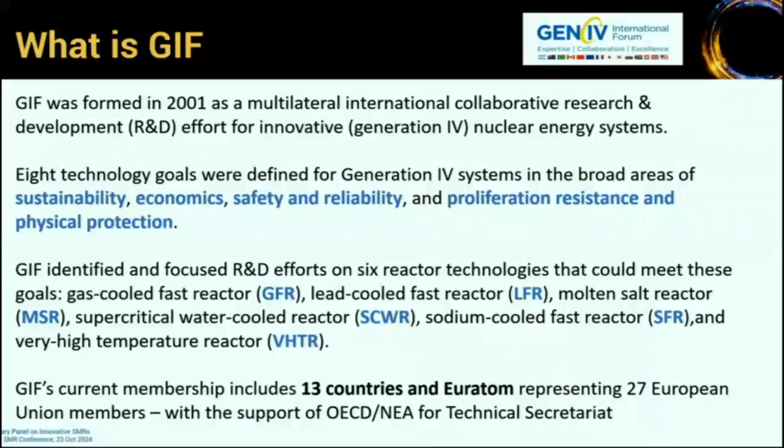In terms of major goals, we have sustainability, meaning long-term fuel supply, minimization of waste and long-term stewardship burden. We focus also on excellence in safety and reliability, with very low likelihood and degree of core damage, and eliminating the need for off-site emergency response. We also work on economics, with a life cycle cost advantage over other energy sources and financial risk comparable to other energy projects. And finally, proliferation resistance and physical protection, in terms of unattractive material diversion pathways and enhanced physical protection against terrorism.

The key mission for the past 3 years was accelerating the readiness of Gen IV systems to meet the 2050 net zero goals. We strengthen Gen IV system features for combating climate change with flexible operation and non-electric applications, an important point we developed. We support transition from R&D to demonstration and deployment in terms of TRL, but also regulatory readiness and improved economics. We strengthen GIF relevance to industry with close connection with industrial partners, and we have a senior industry advisory panel. And we support the Gen IV talent pipeline. It's very important for us to increase the attractiveness of our field to young talents, and we support development, demonstration, and deployment in this field.

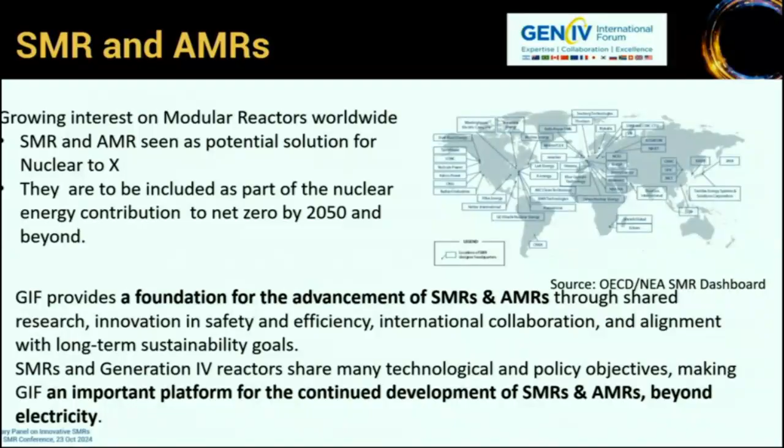Then more recently, Google with a great deal with Kairos Power, and the first reactor from Kairos Power is the first in 50 years that is a non-LWR reactor that obtained clearance for construction in the US. 50 years. So it's a very important milestone. And more recently, Amazon invested more than 500 million dollars in X-Energy to develop modular reactors. So we are facing a very important momentum. So collaboration is key for successful development in this area.

And of course, we have a great cooperation with IAEA, and the IAEA participation in GIF methodology and working groups is very important for us. GIF IAEA interface meetings coordinate collaborative efforts. We have a joint workshop on safety and advanced reactors, and we participate in NHSI, the Nuclear Harmonization and Standardization Initiative. It's very important for us. GIF is very involved in that field, and for us, NHSI and Harmonize by Euratom are very important.

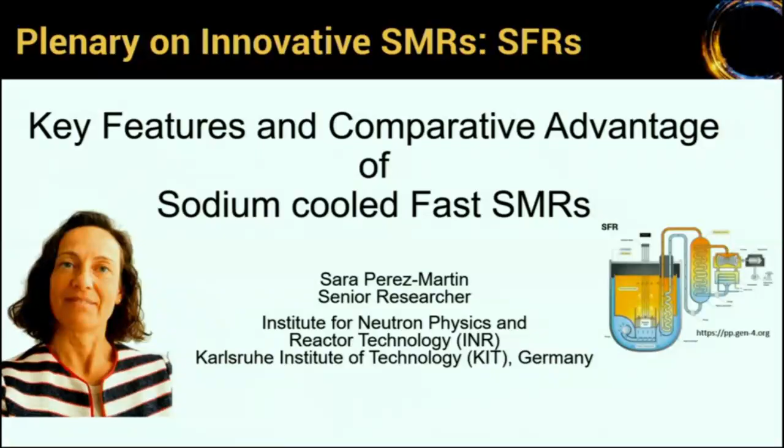There are quite different topics where sodium performs well, in terms of fuel, for instance, because of the fast spectrum, which is the operation of the sodium fast reactor. It means that the production of minor actinides for long-term storage is lower. It could also allow the fuel cycle to be closed, to recycle and transmute. And for the core layout, safety performance is foreseen. We know the issues about reactivity insertion, and we can tackle these problems with a special cake shape for the core. These are key features where we enhance, for instance, the neutron leakage. I don't go into detail, but just to let you know the key features.

Sodium itself has good qualities for boiling, for instance. It's high enough; there is quite a large margin for boiling, and the operating regime is also high. So this allows flexibility in design and operation. Heat transfer as well allows compact cores, which is also good for the economics. And the reactor layout presents a variety between loop and pool design, depending on the option. For instance, for the pool option, the pumps are immersed.

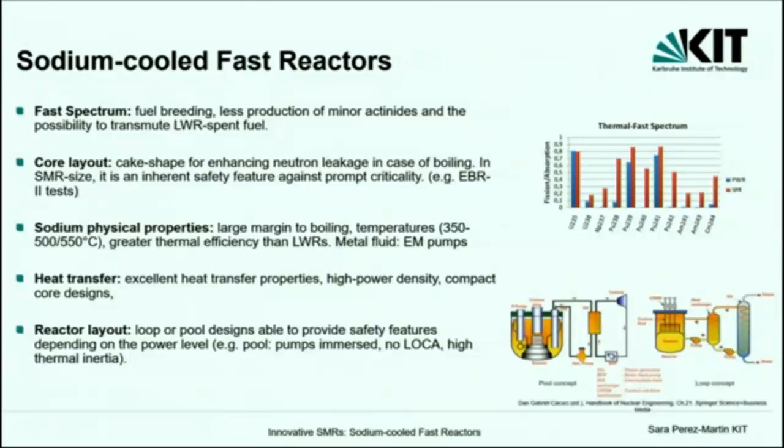So it means that no LOCA is possible. It has a large inertia, so it provides additional inherent safety features. For the safety itself, as I mentioned, there are different ways on how to perform these safety measures. Safety measures can be applied to the fuel level by doing different design of the pins, heterogeneous or shorter in the core zone. There are different options.

Passive systems are already included because of the natural circulation performance of sodium. The primary loop is under low pressure, so it means we don't really have to tackle that problem of high pressure. And then the water-sodium interaction, which is also a chemical reaction we try to avoid, can be addressed by inserting a typical intermediate sodium loop in between the primary and the power conversion system.

Another key feature to mention is that it has a large operational experience commercially, with more than 500 reactor years of experience. It includes also current projects in China, Russia, India, worldwide.

So I would like to mention as well this last point, load following. Because of the high temperatures, we are talking about sodium temperatures between 350 and 500, this allows to have an intermediate thermal storage where with an affordable size we can store energy and then be in a load following mode, supporting the grid stability and the load operation.

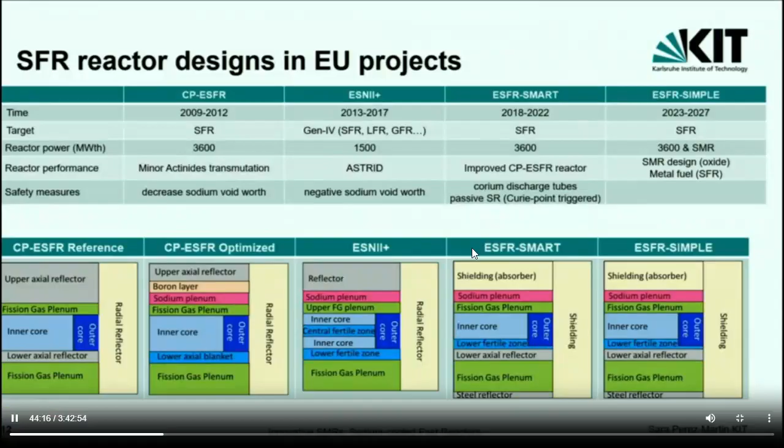In comparison with other reactors, we will see afterwards other coolants, etc. There are comparative advantages in sodium cooled fast reactor. Fast spectrum, as I mentioned at the beginning, produces less minor actinides. So compared to thermal spectrum, it has big advantages. For the temperatures, again, we are talking about high temperature coolant, so the thermal cycle is more efficient.

Low pressure is also a good feature, and then the extensive experience, not only commercial, but also R&D, small facilities. This will allow us to make code validation or to improve the simulation of the system. And this can help in the future for designing more innovative systems.

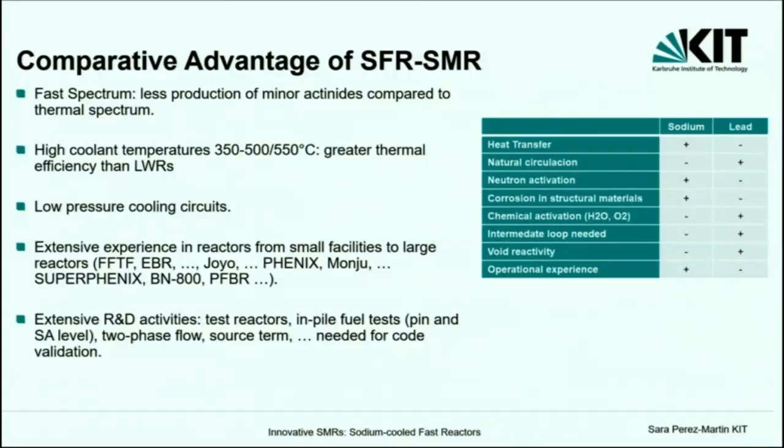So as a conclusion, I just wanted to tell you that the sodium fast reactor is ready for being one of the designs for the small modular reactor. Even for this medium small size reactor, it has a larger safety performance compared to the biggest one. And then the integration of thermal energy storage is very attractive also for the integration of such systems in the future energy grid.

Last point to mention is that for sure we need R&D, collaborative projects, and maybe IAEA is also here as one of the key actors in putting together many research organizations and utilities for pursuing this.

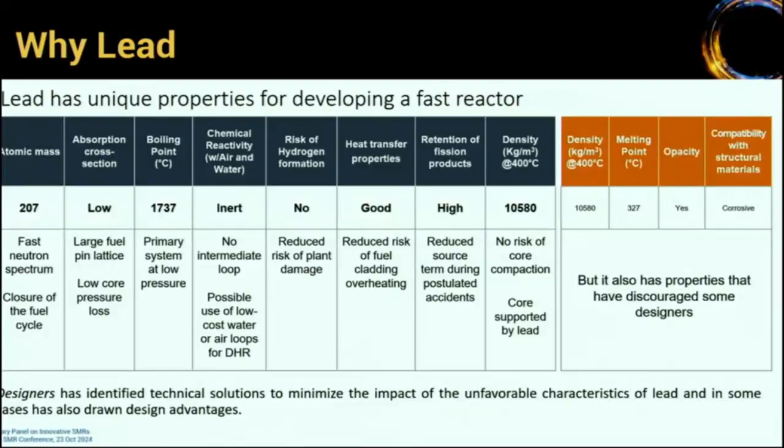A problem could be the opacity, because we need to provide in-service inspection in our system. And of course, as you well know, compatibility of structural materials is a problem that we are facing in the development of the technology.

So the use of this kind of coolant required the development of new technologies, new systems and components. Several work has been performed worldwide. First of all, I need to mention the strong activity we are performing in the frame of the GIF activity. In the GIF, we are able to stay in touch with all the players worldwide.

So there, Europe is working with Russia, with the US, with Japan, and others, and China, of course. It's worth mentioning that in Russia, for example, the Brest reactor is under construction. So the technological readiness level of this technology is large enough for considering its applicability to the market.

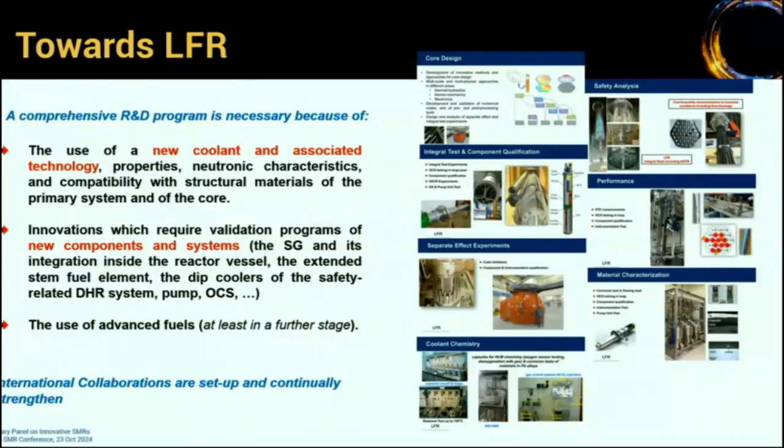As you can see from this slide, many activities are ongoing in Europe in terms of R&D. Many activities have been performed in Italy, in Romania, in Sweden, in Belgium, and in Germany and other countries. So the technological readiness level of this technology is increasing day by day, and the maturity is growing up very quickly. According to that, there are now industries involved in the development of this technology, looking forward to support the decarbonization of the energy mix and to support the energy transition by 2050.

It's worth mentioning the activity that we performed for several years in Europe, involving also Italy, for the Alfred reactor, supported by the Falcon Consortium. This is a consortium in which Enea, RATEN ICN, and Ansaldo Nucleare have worked for a while developing the technology, and presently we are working with our colleagues from SCK CEN to further focalize the efforts.

Recently, Belgium is moving on the design of SMR LFR. This will allow us to have the opportunity to focalize the efforts. And so presently we are discussing, at the level of the country, an agreement between Italy, Romania, and Belgium, starting from the bottom. So first of all, we are putting the players on the same table, looking forward to having a common roadmap for the development of SMR LFR.

Another important project to demonstrate the maturity of this technology is the activity performed by the Swedish colleagues. There is the project supported by Blykalla with the Sealer 55. It's worth mentioning that this program is supported not only by the country but also by private investors. And the direction they are looking for is still to have a compact primary system cooled by pure lead, but with a difference in the solution for the material.

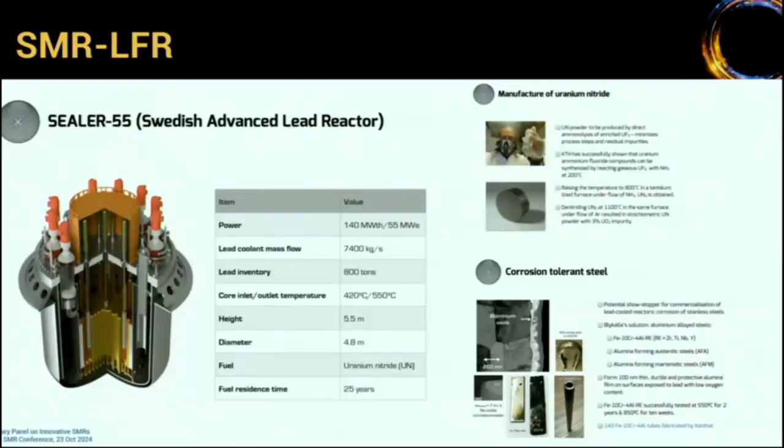Last but not least, it's worth mentioning the big effort being performed by newcleo. We still call it a startup, but it's no more a startup. There are 850 people involved in the project. They are investing more than €500 million in the project, with a huge R&D program, even developed in Italy, in Brasimone, with the design team in Turin, but with the headquarters in France.

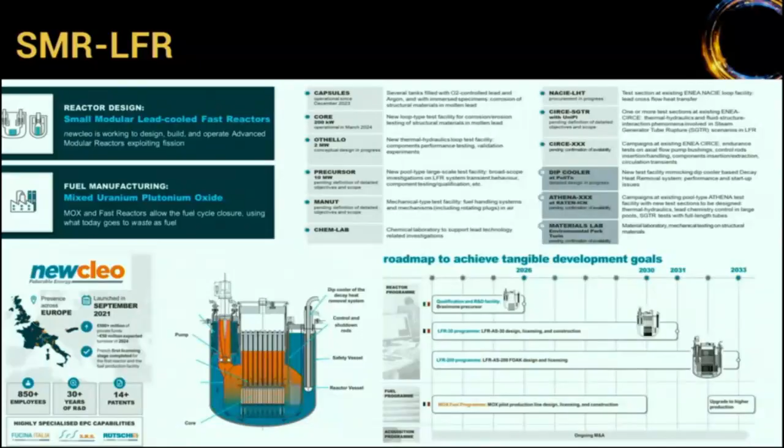So this is very challenging, but they are making very tough efforts on this, and this demonstrates how the LFR is ready for the market. So thank you for your attention.

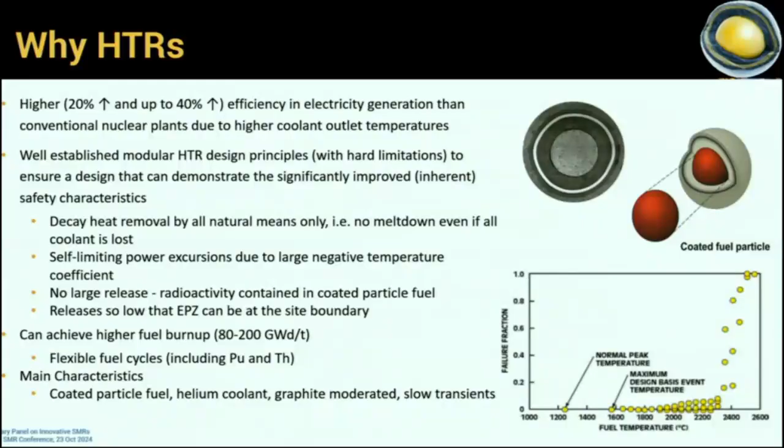What I showed on the right is a graph showing releases from fuel at different temperatures. Basically, the operating temperature of fuel is typically lower than 1,000 degrees. This has been tested to 1,600 degrees, showing you don't have any additional release under accident conditions. You'll see the main releases only occur above 2,000 degrees, so there are large margins to fission product release coming from the coated particle fuel.

So my next message: HTGR is ready for deployment. There have been several test reactors over the years, experimental reactors, and some prototype reactors. There are currently two test reactors, one in Japan and the HTR-10 in China, that have gone through many safety tests and safety demonstrations. So there's a long development history of high-temperature gas-cooled reactors.

So what are the challenges? I think typically we require high enrichment for HTGRs; the minimum is about 8%. Other designs go up to high-assay LEU to achieve the very high burn-up shown earlier. A closed fuel cycle is also not really possible in the thermal spectrum, although there's quite good utilization of plutonium, and it is a quite effective plutonium burner as well.

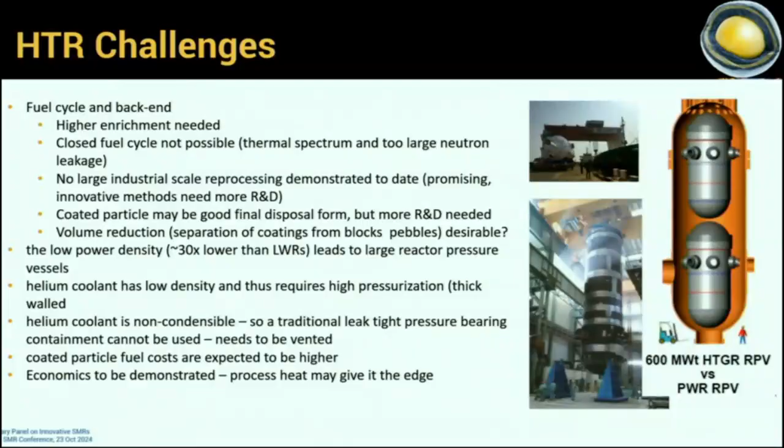I think the most important characteristics of HTGRs are the high temperatures and therefore the process heat applications of this technology. We know that electricity is only responsible for less than 40% of CO2 emissions, so the other 60% needs to be addressed, and that's where high-temperature gas-cooled reactors can make a huge difference, along with other technologies that also achieve high temperatures.

50% of user industrial processes require less than 10 megawatt capability, so that also shows that SMRs, and therefore HTGRs, which are all currently SMRs, is a good solution.

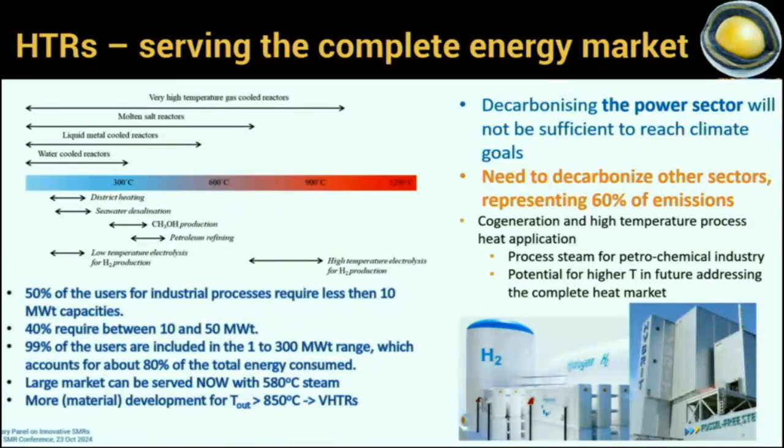So the interest, many different designs throughout the world, many projects at different stages of development, some of them already 20 years achieving good manufacturing of fuel, for example.

More recently we have some of the newcomers, for example Jimmy, that was successful in getting phase 2 funding from the France 2030 project. We all heard about Dow that signed up with X-Energy to have process heat applications for their facilities. And now the new announcements that we heard about in the introduction.

The HTR-PM performed, on this full scale, a loss of cooling accident simulation. So really proven that this inherent safety characteristic is not only true for the small test reactors, or for the AVR that did this already in the 70s, but also now on the full prototype, or commercial demonstration I should say. And also the Shidao HTR-PM in April was connected to a local district heating, also demonstrating this.

And in August it was announced that a large project with 2 light water reactors and 6 units of HTGRs in one plant will be developed specifically for steam production for a petrochemical industry in China.

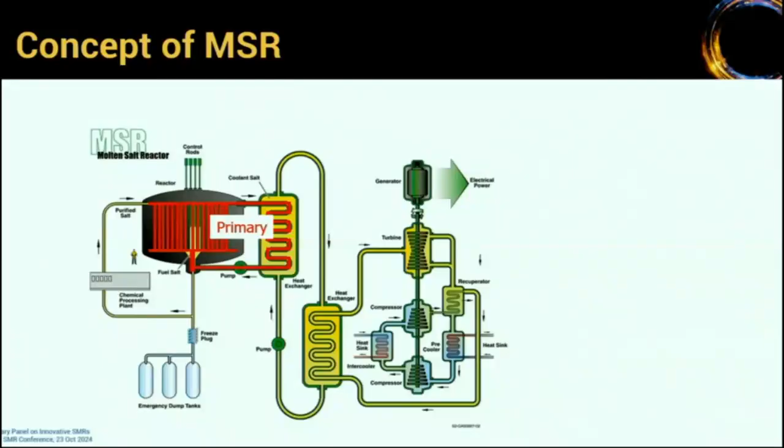Thank you for the possibility to speak here about the MSR. For those of you who don't know how the molten salt reactor works: you have a primary circuit with a fluoride or chloride salt with uranium and thorium dissolved in it, or uranium and plutonium, or only plutonium. The heat is extracted via a secondary circuit to the energy conversion system. Because of the high temperature, this can be a Brayton cycle instead of a Rankine cycle.

There are a few options only accessible for the molten salt reactor. You can withdraw a little bit of the salt every day or every week, clean it, and pass it back to the reactor core. You can also dump the molten salt in emergency dump tanks, or, because of the liquid form of the fuel, you can extract the decay heat by other means. In any case, because it's liquid, it's easier than in other reactors, we believe.

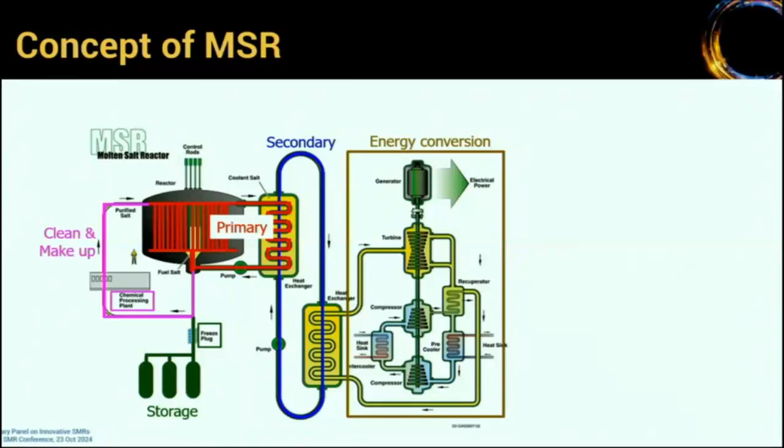Here you see the reactor core of the Molten Salt Reactor Experiment that ran already for 4 years intermittently in the US, from '65 to '69.

There's not one molten salt reactor - there's a large variety of molten salt reactors. When you dive into the liquid fuel reactor science and technology, you get all different kinds of possibilities that you can utilize, similar to the large variety of solid fuel reactors that we have. You can have molten salt cooled reactors, molten salt reactors with a thermal spectrum with graphite as moderator or other moderators, and you can have fast reactors with fluoride salts, chloride salts, etc. So this gives you a large variety of options.

That's why I also tend to look at the Generation 4 reactors in a different way: on one side you have solid fuel reactors with a large variety of options of fuels and coolants, and you have molten salt reactors, liquid fuel reactors, with a similar variety of options. In the last 10 years, in the European framework projects, we have worked on a molten salt fast reactor that you see here in the bottom right corner. And of course, for each of these reactors, you can have small modular designs as well.

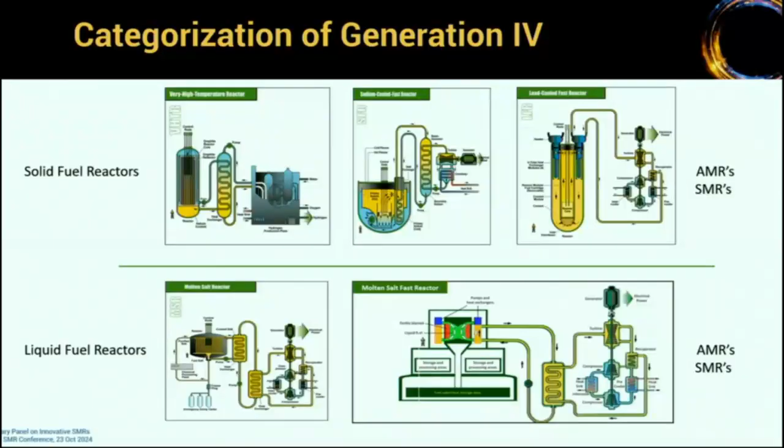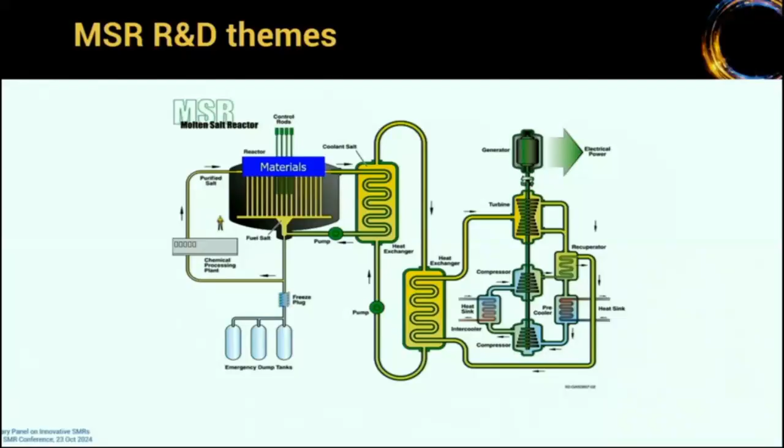What are now the big themes in a molten salt reactor that we need to address? First of all, there is, of course, a material research area to understand the corrosion of materials in contact with salts and how you can avoid this corrosion. So it's on one hand looking at better structural materials, on the other hand also looking at mechanisms to clean the salt and to make the salt in such a shape that it's much less corrosive than you would expect.

Secondly, in the core, you have a lot of reactor physics to be done. The liquid fuel, really, for reactor physicists, is a very nice research area because of the precursors that also circulate in your system. Safety analysis, of course, it's not only neutronics, but because of the liquid shape, always neutronics coupled to CFD, coupled to all kinds of chemistry options that you can have in your code systems, coupled to mechanics. So it's really a multi-physics, multi-chemistry approach in the safety analysis.

And of course we need a large database on all kinds of salt properties that you utilize in your reactor. This is a function of temperature typically, this is a function of impurities in your salt, etc. So it is important that you also get a theoretical model to calculate all these properties. And so research is also being done in that field.

Safety analysis of decay heat removal in your system is important, whether it is dump tanks or other mechanisms to remove decay heat from your system. Liquid fuel typically makes it easier, but it's not obvious, of course. So also this is something that needs thorough analysis.

The extraction processes, so to clean the salt: how to get rid of the gaseous fission products, how to get rid of the noble metals, other lanthanides, for example, in your salt. This all is a chemical processing plant that either you can attach to the molten salt reactor online, fueling, refueling, or that you can do in a batch-wise fashion.

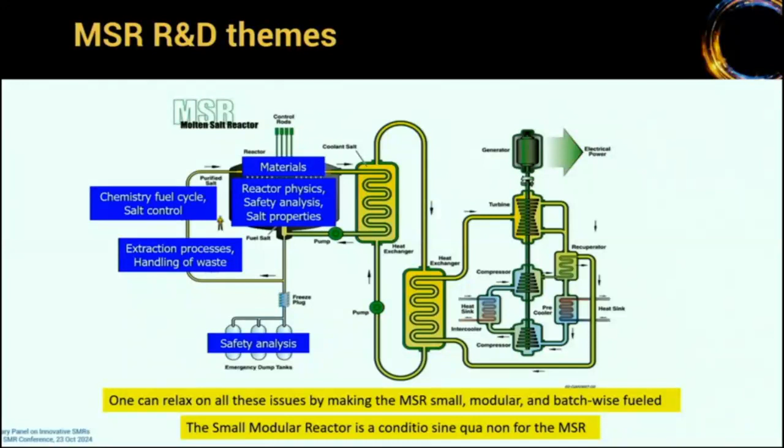So the SMR concept is really on the critical path towards the implementation of large molten salt reactors. So for me, this is really something that we need to do, otherwise we will never get these large reactors. In these large reactors where you have online processing, there's so much innovation, so much new stuff that it will be very difficult to start directly with these large reactors. So we need small modular reactors.

There are a lot of companies working on molten salt reactors, startup companies, more established companies. These are not all working in the SMR field. Some of them are also working in the large reactor field. This is only in Europe and the US. There's also a couple of them, of course, in Asia, etc. So there's also a large variety in startups. And this reflects also the variety that you can have in the technology of molten salt reactors.

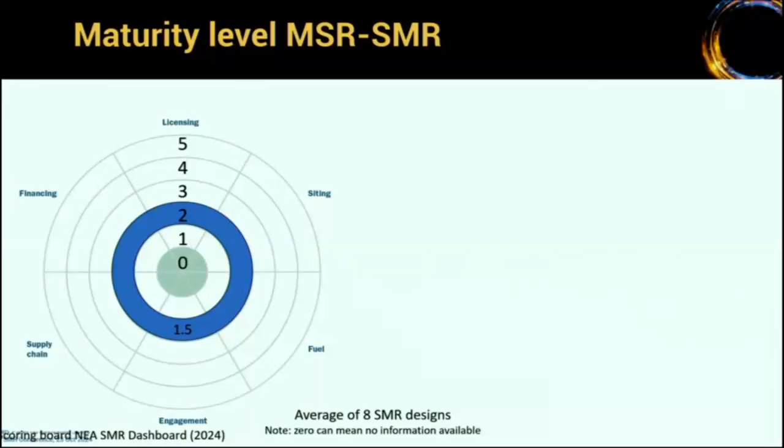If you look at the maturity level, there is some need for speed-up. So the SMR development could help us in this. Currently, if you look at the NEA dashboard, the status of the SMRs in the field of MSR is around 1.5, with a strong focus on engagement and a little bit lacking in the other fields. So there's still a lot of work to do, but by combining forces at universities, research laboratories and startups, I think we can make big progress in the SMR field.

So for me, the long-term vision of MSR is, of course, to have a large reactor with online processing where you can have breeding of fuel on the site, either from uranium or from thorium, and have a clean fuel cycle where all the actinides can remain in the liquid salt, and you extract only the fission products, and that's then eventually treated as waste. But we have to go through the way of SMR to make all this happen.

Otherwise, to build a large reactor without the SMR development is a step too large, I think. There's still a lot of work to do, and below the questions of licensing, siting, fuel supply chain, etc., there's also a lot of fundamental research to be done.

So in the SAMOFAR and SAMOSAFER projects of Euratom that were coordinated by TU Delft, we now have the ENDURANCE project coordinated by Politecnico di Milano, and there they focus much more on the fundamental science needed by the startups in the molten salt reactor field. And I think this is really a very wise approach, because this is really on the critical path towards implementation of MSR. Thank you very much.

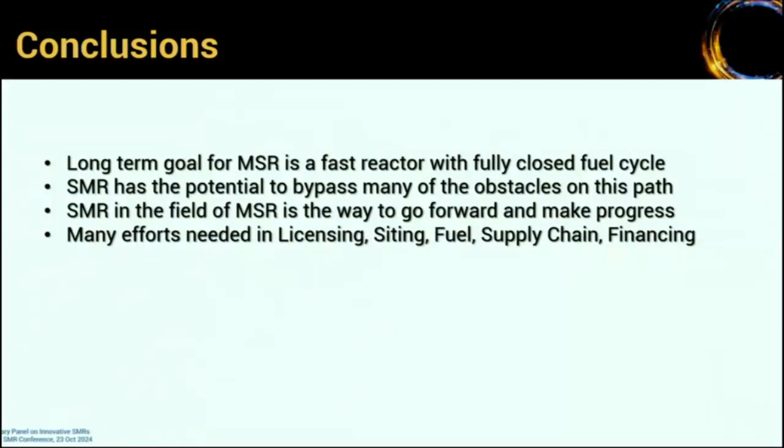Thank you very much, Jan-Leen. Now I'd like to ask Ms. Sarah Eaton to review briefly these 5 technologies from the point of view of safety and regulation. Please. Thanks very much. Let's just jump right into it.

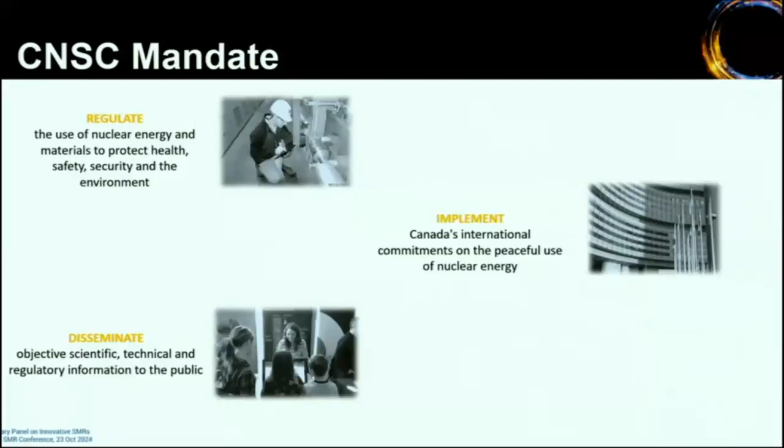So the Canadian Nuclear Safety Commission is Canada's nuclear safety regulator, and my goal for this plenary session is that when you leave, you accept my view that risk-informed regulation supports innovation. So everyone will say to us in Canada, the world is watching, and I can assure you that we feel the eyes on us as we do our work. And we're approaching our licensing and our approach to regulation for small modular reactors using a three-pronged approach.

The first is using our robust performance-based licensing process to review these technologies. We're leveraging our vendor design review, which allows us to have early engagement with industry to understand the novel features and for us to be able to explain Canadian requirements. And the third is our 5-year, $50 million project on small modular reactor readiness to ensure that our staff have the capacity and capability to review these designs to ensure that we can provide the clarity of regulatory expectations that industry requires.

So, risk-informed regulation supports innovation. At the CNSC, we've engaged closely and connected with industry to be able to understand the new designs that are being proposed in Canada, the novel features, and the innovative deployment models, which I think is a part of innovation that's important that we discuss. We also are looking at how we can better communicate our regulatory expectations with regards to innovative designs and these deployment models. And innovation can simplify reactor designs, but this needs to be backed by evidence.

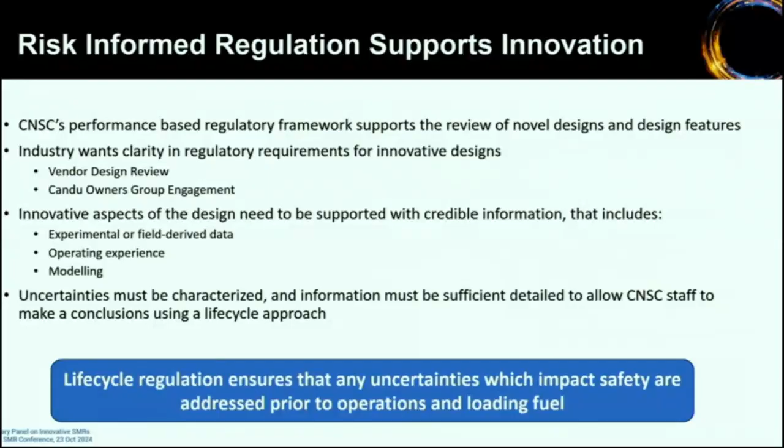And so, do we need all this evidence on day one? No. That's the benefit of a life cycle approach. A life cycle approach allows you to look at information in an iterative fashion to be able to make more concrete decisions as you move through the licensing process. But we need applicants to show up with the level of detail that's necessary for that licensing stage. And we need operators to be a risk-informed customer, to be an informed customer, that they've done their own due diligence on these innovative designs, that they are satisfied before coming to the regulator to look for approval.

We think that collaboration supports innovation. The US, UK, Canada trilateral memorandum of cooperation, we feel, is the global model for regulatory collaboration on SMR reviews. And the benefits are many. Training between regulator to regulator, staff exchanges, the ability to take a previously conducted review, leverage that and use that in your own technical review is a way to be more efficient, but it also adds robustness to your regulatory review process. And focused technology-specific collaboration gives us the means to be more effective and efficient.

And as we have an opportunity to do more of this, I think you'll see the benefits of that as we move forward. And I think our collaboration has shown that when we work together, we're stronger. And I think that helps support nuclear safety.

What we haven't heard enough at this conference is the importance, I would say the need, for robust engagement with the public and Indigenous nations and communities. And so if we don't have engagement with the public and Indigenous nations, projects will not be successful. This is a shared responsibility between vendors, operators, supply chain, and also the regulators.

But we need to ensure that the public has access to technical information so they can understand these innovative designs, that information is shared in a way that's understandable to all levels. So to my mother who has no understanding of our industry, to those retired folks who have a lot of understanding in our industry, to be able to build that as we work through.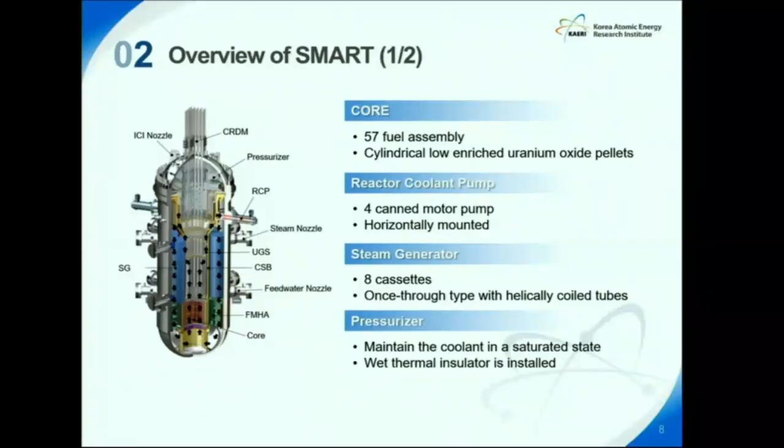for another 36 hours. The second passive system is the passive safety injection system. PSIS consists of two mechanically independent trains. Each train is composed of one core makeup tank and one safety injection tank with related valves and pipes. When actuated, the CMT outlet isolation valves open, resulting in the injection of the coolant in the CMT into the RCS through the safety injection line by gravitational force.

The last passive system is the containment pressure and radioactivity suppression system. CPRSS consists of several tanks with related valves and pipes. When radioactive material is discharged from the RCS or secondary system, the CPRSS suppresses temperature and pressure rise in the containment and removes fission products.

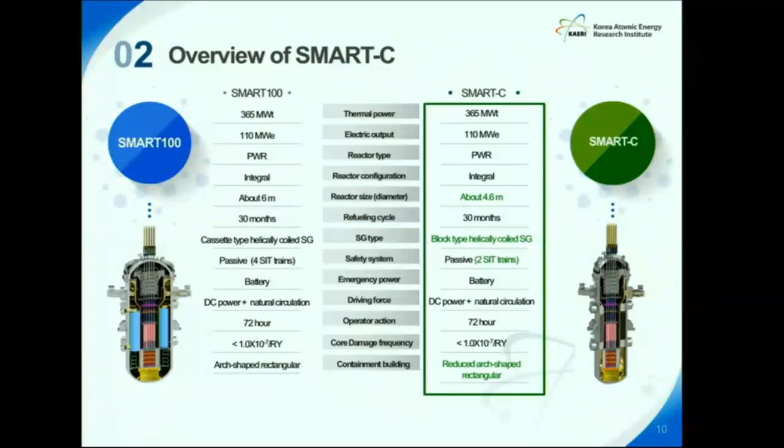This slide highlights the difference between SMART 100 and SMART C. The main difference is in the size. The size has been optimized for transportability and economic viability. Reactor vessel size is optimized by modifying one of the main components, the steam generator, while the containment building size is modified by optimizing the IRWST and one of the safety systems, specifically the PSIS. These design improvements will be explained in the following slides.

The volume of the reactor has been reduced by 45%, which was essential in achieving portability and cost effectiveness. This reduction is particularly important for utilizing SMART C in remote industrial fields such as oil mining in Canada, where access to the electrical grid is limited or difficult. This was accomplished by replacing 8 cassette-type steam generators with a block-type steam generator. In the modified design, the helically coiled tubes are wrapped around the core support barrel, as shown in this figure.

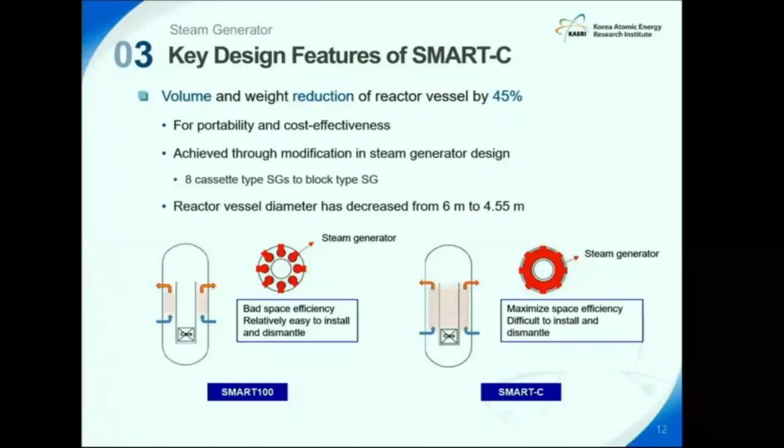This new configuration maximizes space efficiency compared to the cassette-type steam generators, allowing for a more compact reactor vessel while maintaining the same thermal efficiency. Furthermore, the size of the containment building has been reduced by optimizing the design of PSIS. A new concept for the injection tank has been proposed.

Instead of installing the core makeup tank and safety injection tank separately, a single two-stage tank has been designed. This design achieves 2 different injection rates by implementing independent injection lines with different orifices. This innovative approach simplifies the safety system, contributing to a smaller containment building size while maintaining the required safety performance.

To summarize, an integral type SMR, SMART 100, has been developed by the Korea Atomic Energy Research Institute. It is one of the most promising SMRs with a high degree of development maturity, having gained standard design approval twice. A variation of SMART 100 called SMART C has been proposed. It is an advanced version with enhanced portability and economic viability. Further detailed design will be carried out, and the feasibility of SMART C in various industrial fields will be evaluated.

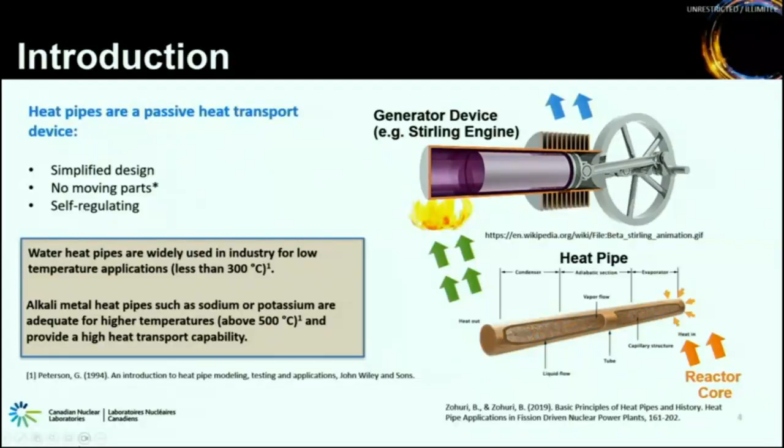I'm going to talk now about a little bit of methodology of the experiments we conducted, but first I'm going to talk about the facility where we executed those tests. It's a multi-purpose facility that's designed for destructive testing, and we do different experiments from normal operation to accident scenario experiments. It's a test cell enclosure that allows us to test high temperature and pressure experiments. And we have several devices to provide power and also high pressure gas systems up to 20 megapascals.

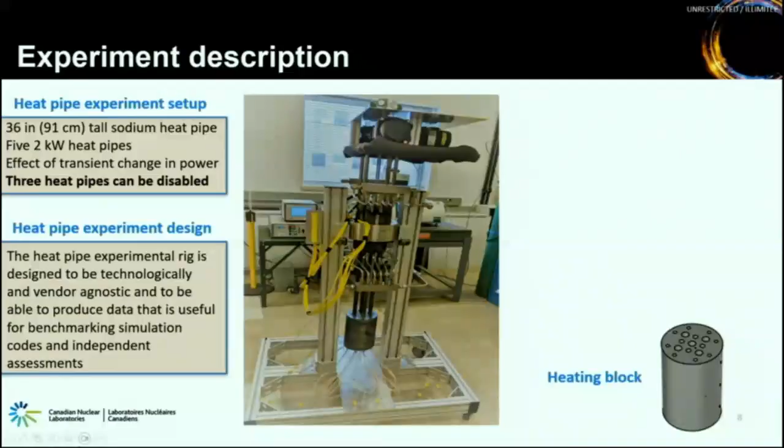The heat pipe array experiment is a 36-inch experiment that's composed of a heating block, 5 heat pipes, and a cooling block. The design of this experiment is meant to be vendor agnostic. This is due to the funding source. And it's going to be mainly meant for benchmarking simulation codes and independent assessments.

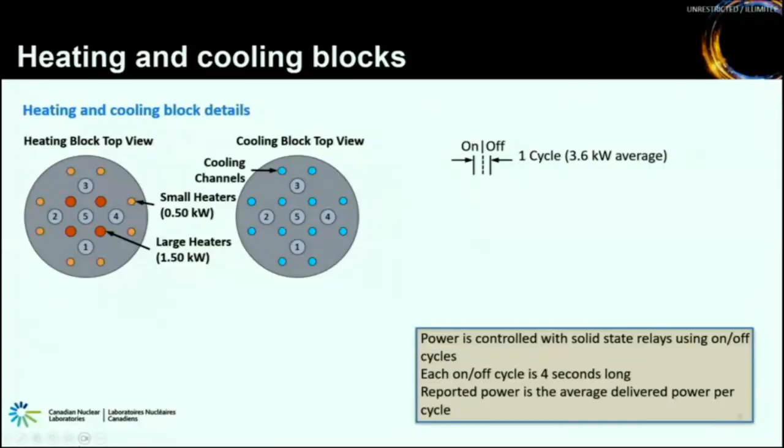The heating block has the 5 heat pipes, 1 in the center and 4 around a 3-inch diameter. There are in total 12 channels where we insert cartridge heaters, 4 large heaters at 1.5 kilowatts in the center, and 8 smaller heaters at half a kilowatt on the outside. Mimicking the heating block is the cooling block, which has the same channels, but instead it's where the coolant flows.

Power is applied to the heaters in a pulsing manner. For 100%, it's continuous power, but if we want to vary this power, we turn off the heaters in a total 4-second long period for a certain amount. For instance, the graph there shows a 60% setting and how it would look. Measurements are done with voltage probes and current shunts for the input power, while the heat transfer characteristics are measured from the coolant, which are flow rate, pressure, and temperature.

The experiment is instrumented with mainly thermocouples. We have 1 thermocouple per heat pipe, except for the central one in the heating block. And also we have 3 thermocouples that run vertically between heat pipe 2 and 5. Then we have 5 thermocouples, 1 for each heat pipe at the base of the adiabatic section, which is half an inch away from the heating block. Then at the midpoint as well, and 5 at the top, which is half an inch away from the cooling block. The cooling block mimics the heating block and also has 4 thermocouples, 1 for each external heat pipe, but not 1 for the central one.

Additionally, there are 3 heat pipes that have a valve that allows a non-condensable gas, inert gas, to be injected into them and allows them to be disabled. Some of the preliminary test simulations were meant to allow us to design the experiments that we wanted to run.

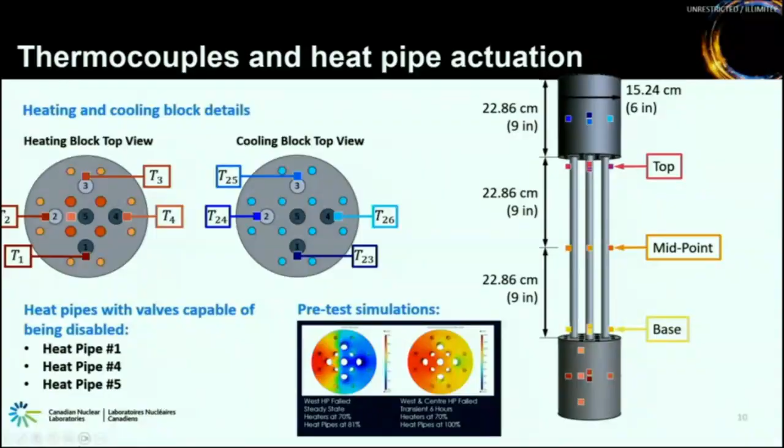In the first phase, we heat up the heating block using the cartridge heaters that I just explained, and as temperature increases in the heating block and reaches around 470 degrees Celsius, the evaporator and subsequently the adiabatic section of the heat pipe start to heat up quite rapidly, which one would expect from a heat pipe. The coolant's already flowing, and it also starts to increase in temperature. After that, we allow the cooling block to reach temperature as well, which takes a little bit more time.

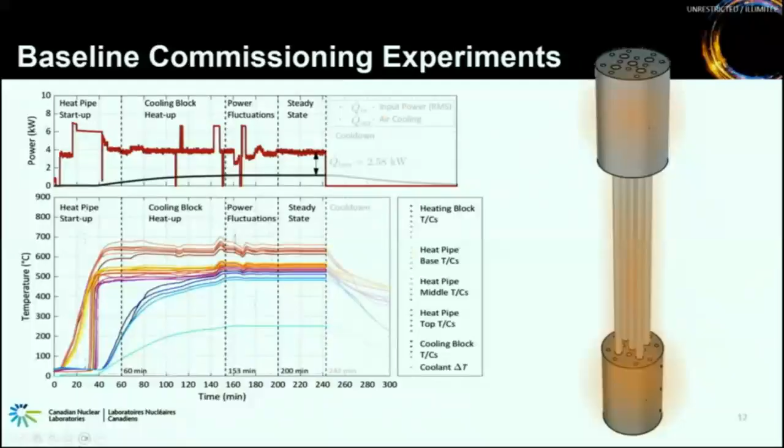And finally, when it reaches temperature, we did some tests to see what was the response of the heat pipes to different changes in power. Finally, we allowed the setup to reach steady state, where we measured the input and the losses in our system.

Some interesting things to show here are the temperature difference between the base and the top of the heat pipe, from 1 to 5, up and down. For instance, at 90 minutes, the difference between the top and the bottom of the heat pipe is around 43, 46 degrees Celsius. Then, once the cooling block reaches temperature, we see a decrease in this temperature difference down to around 10 to 20 degrees Celsius.

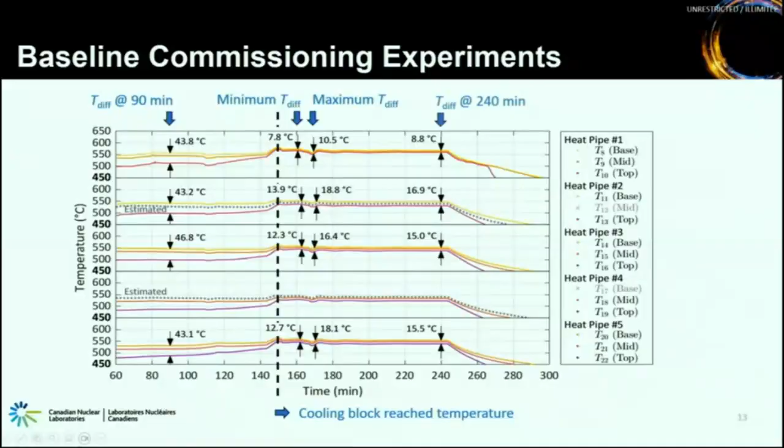This difference is maintained all the way till the end, where we stop the test. The second test was a pulse power test, also a test to see the behavior of the remaining heat pipes once we disable some of them. This test was thought about after we executed a similar test with a single heat pipe and observed an instability. The point of the pulse power was an attempt to replicate that instability.

Again, there's one thermocouple that failed. We pulse the heat pipe with a 5-minute period, and we can see an increase in temperature both in the heating block and also the adiabatic section of the heat pipe in the base, mid, and top, and a little bit as well on the cooling block.

After minute 68, 2 heat pipes were disabled, and we observed a drop in temperature on the mid and top thermocouples of the disabled heat pipes, as well as the cooling block, and an increase in temperature on the base and on the thermocouples near the failed heat pipes in the heating block. In this experiment, the cooling block did not reach temperature.

Some interesting things to observe here: the temperature differences between bottom and top are similar to the ones observed at the beginning. Once the heat pipes are disabled, the minimum temperature difference is still quite high, and the maximum temperature difference is around 219 degrees Celsius, remaining the same almost until the end of the test.

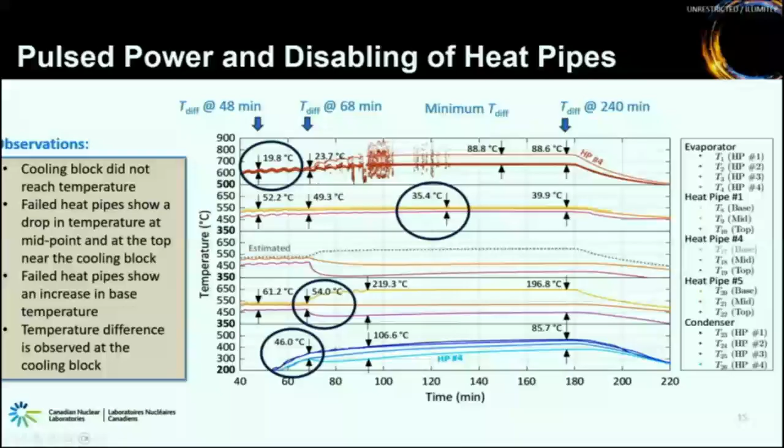The final test was a test to measure the transient non-uniform heating of the heating block. In this case, the heating was varied around the heating block while keeping the power constant. To do that, we turned off a couple of the external heaters in sequence, creating a colder spot on the heating block. This was varied while maintaining the total input of the system the same.

After 122 minutes, we put the power back to a stable state. At 184 minutes, we disabled another heat pipe, number 1. But this time we observed something different.

Although the condenser temperature dropped, the bottom, mid, and top thermocouples in the adiabatic section of the heat pipe that failed did not spread out in temperature and actually became closer together, but all of them increased. You can see that on label HP1, going up.

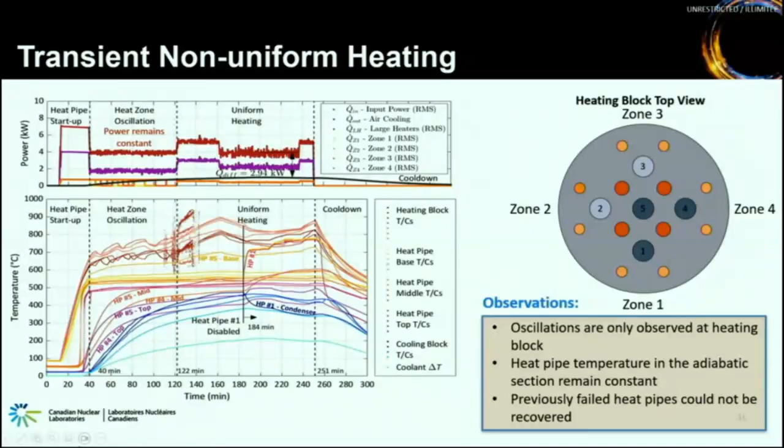A closer look shows that the failed heat pipes keep their high temperature difference, and it's worth noticing that heat pipe number 1, when it failed around 183 minutes, the difference between the top and bottom in the adiabatic section is only 3 degrees Celsius, remaining low all the way until the end of the test.

So in summary, on the first experiment, measurements demonstrated the expected functionality of the sodium heat pipe array. For the second experiment, power pulses produced the associated heat pipe temperature fluctuations we showed, and once at constant power, we did not observe the fluctuations continuing, unlike the first instability observed in previous experiments. Also, after disabling the 2 heat pipes, we observed the base temperature increase while the top decreased, which is what I would expect from failed heat pipes.

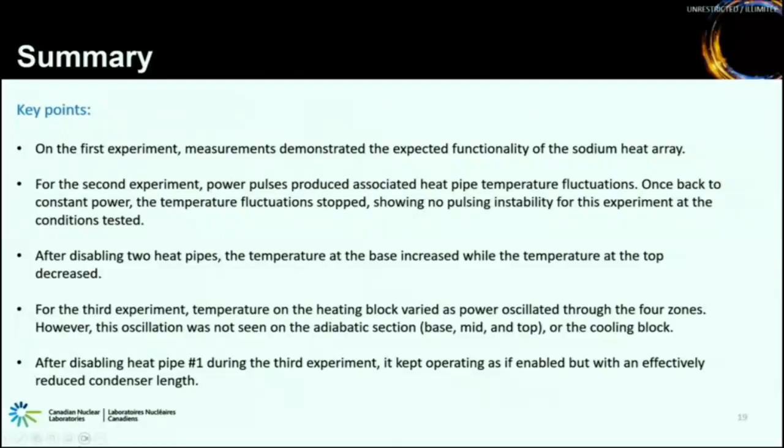For the third experiment, even though there was an oscillation on the heating block while maintaining constant power, we did not observe that oscillation replicated on the cooling block. Finally, after disabling heat pipe number 1, it kept operating as if it was enabled. However, there was what suggests to be a reduction in the condenser length.

Thank you very much.

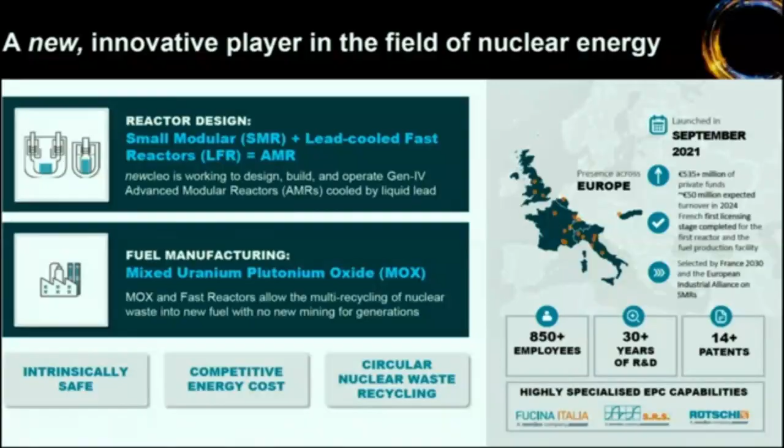We have offices in Italy, France, United Kingdom, Switzerland, and Slovakia. In the meantime, we have bought 3 companies, and all 3 are strongly engaged in our development program. Our mission is to design, construct, and operate a fleet of lead-cooled reactors of 200 megawatts electric, and to provide fuel for our fleet of reactors.

I want to remind that we have done the first pre-licensing process in France, and we have been selected by France 2030, and more recently by the European Industrial Alliance on SMRs. So our objective is to have in the year 2033 ready for operation our first 200 megawatt electric reactor.

But because in Europe there are no fast reactors operating with fast flux, we have decided to build a 30 megawatt reactor, a smaller reactor, to test new material and new fuel, so to be in condition in future to increase the operating temperature of the reactor and to increase the burn-up of the fuel.

Obviously, we'll need fuel. Our reactor will be fed with MOX fuel, but on that we'll have more information this afternoon in the advanced fuel section by my colleague Jean-Michel Marin.

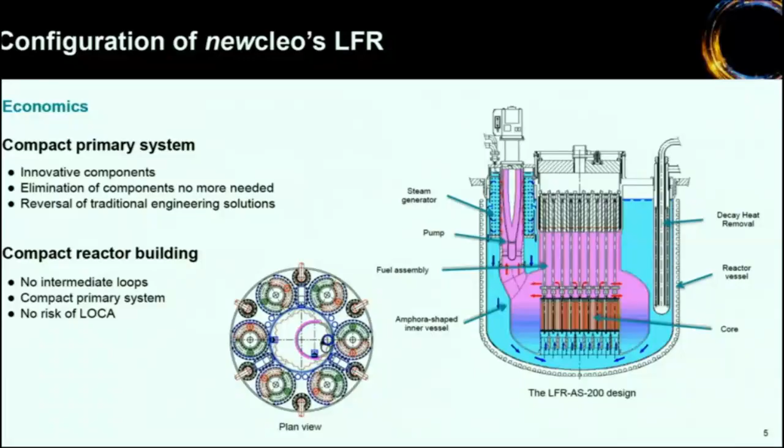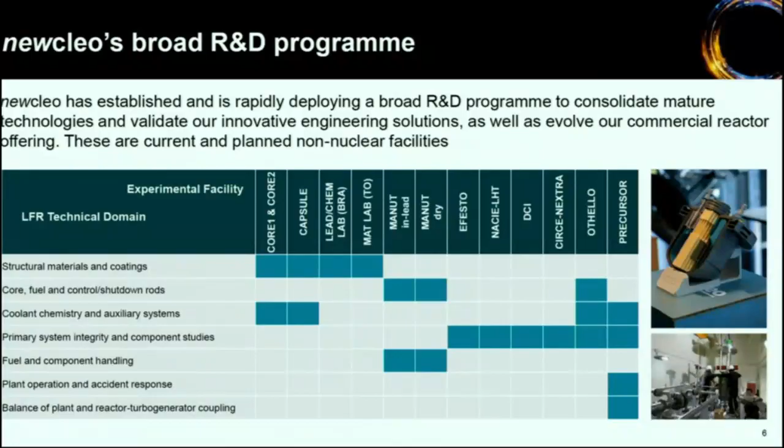So, we have planned at least 12 installed facilities, most of them in lead, that had to provide us all the experimental data that are needed to confirm our design and to make the licensing process. Most of those facilities will be situated in the Brasimone site of ENEA.

It is the site of our PEC reactor. When I was a young engineer, I contributed to the construction of the PEC reactor. It was a 120 megawatt thermal sodium-cooled reactor, nearly completed, but has been dismantled. In any case, the building is still there, so after refurbishment it can be used to install our experimental facility for lead.

And so, we need at least 4 types of tests: test of structural material, test of thermohydraulic components, test of mechanical equipment, and test of the whole behavior of the system to reproduce operational transients and some safety cases of interest.

So, in terms of material test, obviously we have to face the corrosion in lead. So we have already available 108 positions for testing structural material in lead under control of the temperature and the oxygen activity.

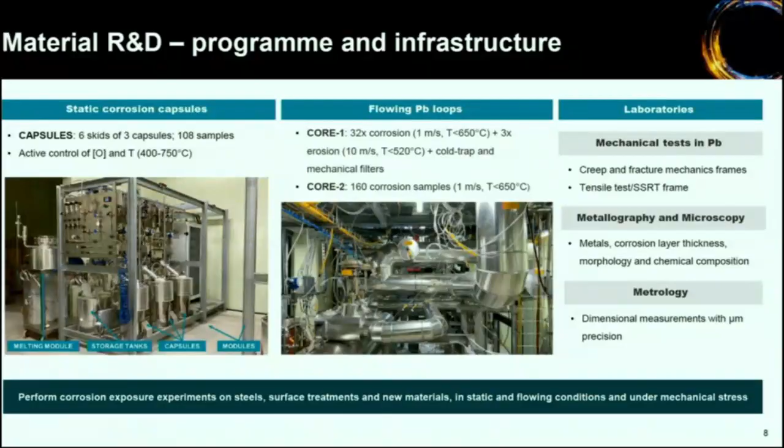In terms of thermohydraulics, we need to test the fuel assembly, the steam generator, the primary pump, the heat removal system. And so we have a specific loop to face all those needs.

In addition to that, we have a facility for fluid-structure interaction, to reproduce earthquake and sloshing effects. This facility will be ready at the end of the year.

Fuel component handling is another issue. Handling in lead is more complicated than in the case of a light water reactor. So we had to simulate the possibility of extracting the fuel assembly from lead and transferring it from the lead pool to the water pool.

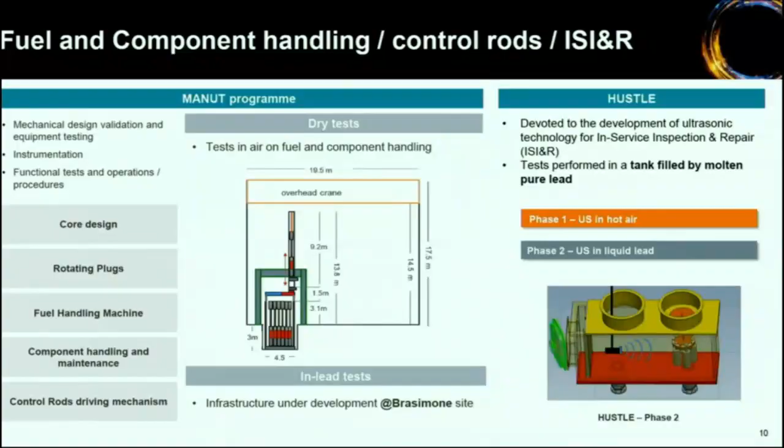This asks for testing of this equipment and also on the associated rotating plug above the reactor roof. In addition, we had to face an important program of in-service inspection, and at the end of the year we have a first equipment ready to simulate the in-service inspection on the outer vessel surface with lead inside.

Finally, the precursor test facility. This is a facility of 10 megawatt thermal, electrically heated, which reproduces at scale the 30 megawatt electric reactor. It will be full scale in height, but the cross-section will be proportional to the power to maintain the same power density, and so reproduce as best as possible all the thermal transients and cases of stratification inside the reactor vessel.

I have to note that the feed water to the steam generator needs to be at a temperature of at least 330, 335 degrees to avoid local freezing of lead. For this reason, we cannot apply the same procedure that we have used, for instance, for Superphenix, to start up the steam generator.

So we had to elaborate an alternative procedure that had to be tested. For this reason, our precursor will be equipped with a turbo generator set, giving us the possibility to reproduce many of the transients, including startup and shutdown, in the best possible way.

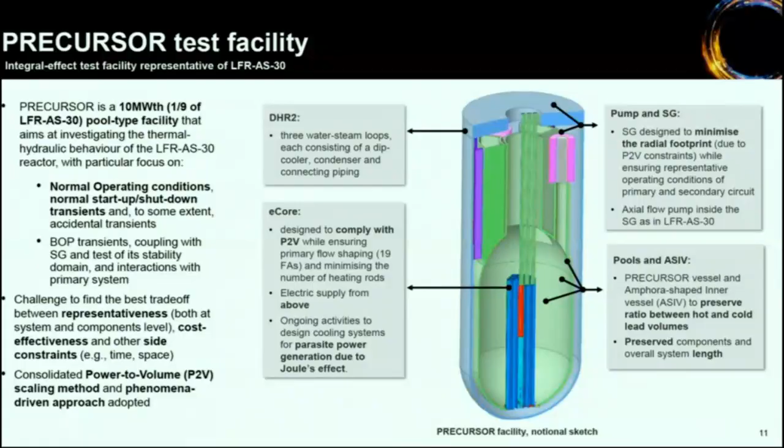So this is the end of my presentation. The only thing I want to add is that all those facilities have to be finished before the year 26. So in 2 years from now, we have already four facilities in operation. All the other facilities have to be designed and constructed to start operating and have the results in time for our licensing process. Thank you for your attention.

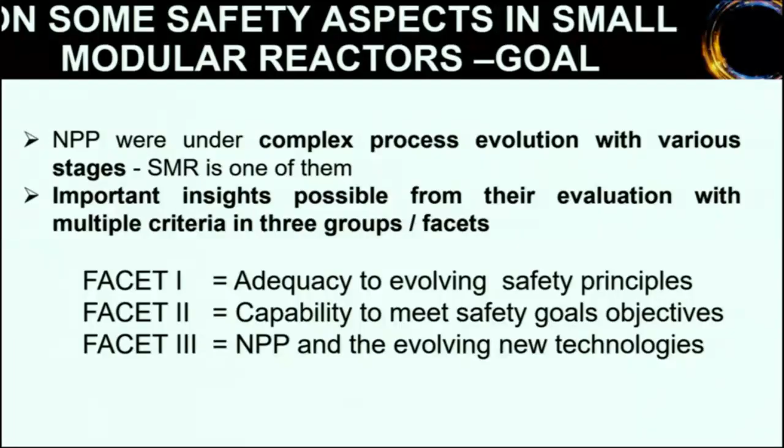The third thing is that a nuclear power plant is not just the technology of the core. It's an envelope of technologies. And I will show the consequences of this approach, which many times are not considered.

So related to the first aspect, there are groups of criteria we have to consider. I will not stop at each of them. There are categories of issues illustrating that we deal with a series of evaluations for which we have big uncertainties. Another group of criteria relates to the fact that we performed safety evaluations for those plants. We want to evaluate future plants, considering safety criteria which are very well defined.

In many papers and communications we had in the last 20 years, including in the agency, related to safety margins and defense in depth criteria and so on, we expressed our opinions and suggested some solutions. In the meantime, in our case, we started to implement them.

Another type of problem is that there are aspects which have indirect impact on safety, and I listed them here. I will mention only one of them, because lately I realized that we almost discard this thing. Why are we building nuclear power plants? Why are we talking about concrete, metals, and so on? We are building for people. We are building not for one generation; we are building and operating for the next 2-3 generations. So the technology, human generation is maybe the weakest link in all these things.

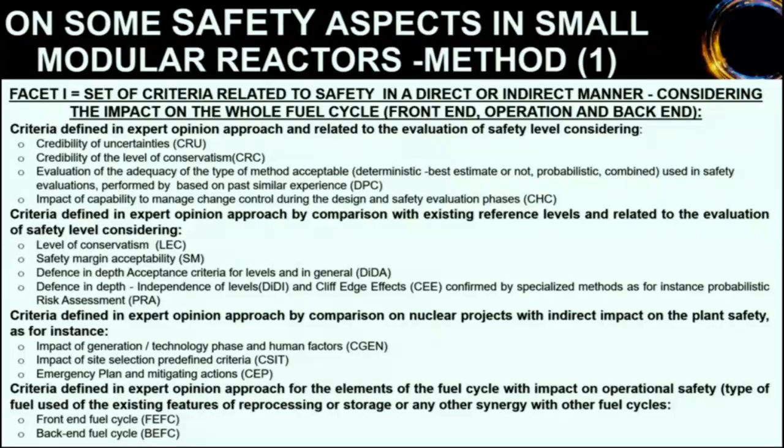And when I hear declarations from physicists and engineers that we build something that will not fail, I become very worried. Whatever humans build, it fails. If we don't have a plan B, we are lost. So there are various periods, and in each period the paradigms for dealing with safety objectives changed. At this moment, after Fukushima, we are in a new situation, enveloping and considering all the lessons learned so far.

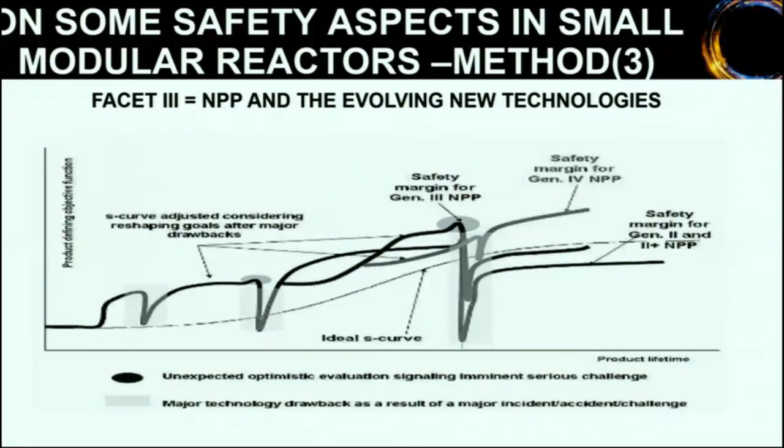What we actually have here is that technology changes. Each technology has its own timing, and we have to consider that because, for instance, now we see that artificial intelligence needs more power. What if quantum computing takes over the existing HPC? We don't know. The types of plants for which we performed this evaluation are of three categories: water SMRs, gas SMRs, and molten salt SMRs.

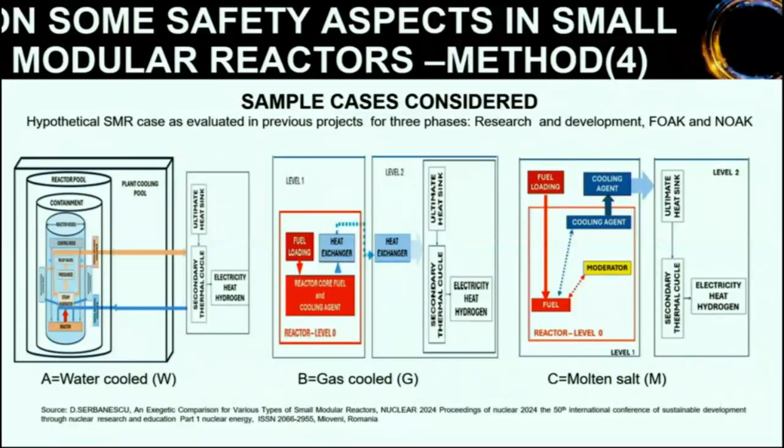If we have to consider the real life, we are going to have research and development, a FOAK period, and a NOAK period. If we consider what is best in each of these periods, small modular reactors of water type seem to be better fit and available. The others still have to research. I'll give only 2 examples.

Please have a look how many code cases in ASME we need for gas reactors, 17. Please have a look on the fact that we still didn't start to develop code cases for molten salt. So there is a way to go for this phase. For the FOAK phase, they might be comparable. That's what the picture shows. And for the NOAK phase, yes, they will be comparable.

Per total, in my view, we need to get to the moment when a generation 4 will be fully usable and will take all the advantages they have, but considering that all the other phases were passed. I'll say only one thing and then I will finish.

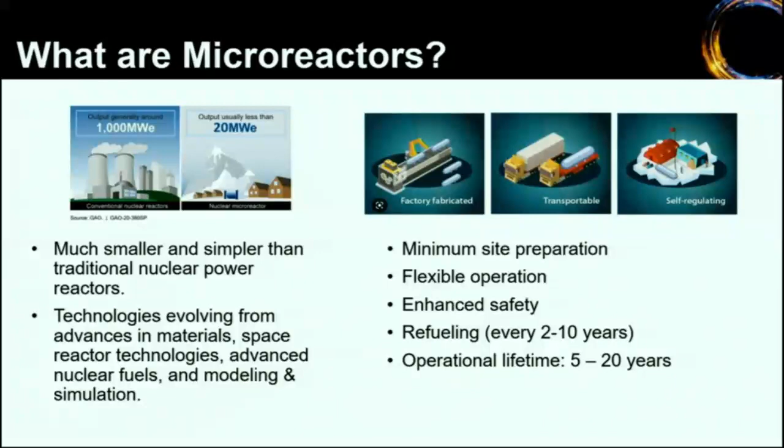So from a programmatic perspective, and this is one of Department of Energy's several congressionally appropriated directed research and development programs, we focus on technology solutions utilizing the unique capability and expertise that exists in the United States of America's DOE laboratory complex. There are 17 laboratories. We utilize the unique infrastructure and expertise to find technology solutions to improve the economics or licensability of microreactors, because the essence of their limitations with respect to deployment at this point are economic and licensing. So naturally we focus on this.

We're comprised of 4 technical focus areas. System integration and analysis looks at techno-economic analyses and regulatory support topics. Technology maturation is a place that we look at things like microreactor automatic control systems, characterization of robust structural moderator materials like yttrium hydride, for instance. We had our demonstration support capabilities covered by Piyush Sabharwal in yesterday's session quite well. And then we get to microreactor application, which is integrated nuclear testing, and this is where the MARVEL microreactor sits.

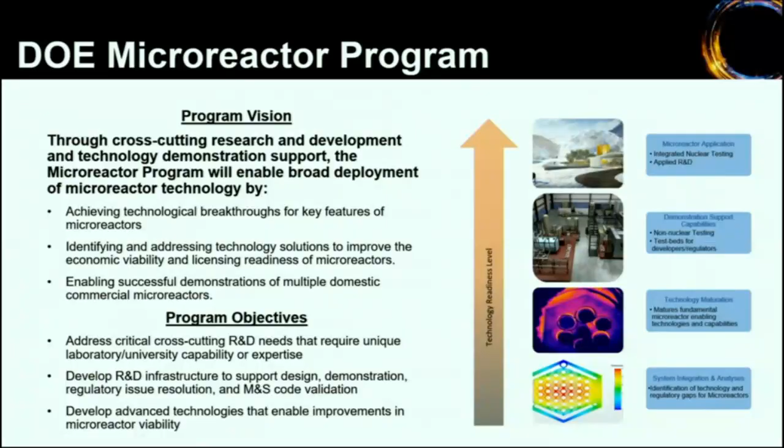So MARVEL is an acronym. I've thus far avoided being contacted by the MARVEL lawyers, and we'll keep it that way. But it stands for Microreactor Applications Research, Validation, and Evaluation. The overarching goal of the MARVEL project is to move from a so-called paper reactor to a real reactor. There are hundreds or perhaps thousands of reactor concepts available on paper, but the trick is taking a paper concept and making it a reality, and that's what we seek to do.

Again, the overarching goal of this project is to design, develop, fabricate, construct, operate, and decommission a very small microreactor. It affords us the opportunity to train our engineering staff in preparation for demonstration of commercial concepts. The talk that'll follow will talk about some of the infrastructure supporting commercial demonstrations. But we need to prepare our workforce within the National Laboratory Complex, and this is one of the ways we're doing it. MARVEL will produce combined heat and power to a functional microgrid once it becomes operational.

Very importantly, this is about sharing lessons learned with commercial developers. So all that experience we gain in the development, fabrication, construction, and operation of this microreactor will be incredibly useful to the developers, to the NRC and other regulators, and to end users. It addresses an age-old question, and that age-old question is, when can we see one in operation? There are no licensed microreactor concepts available at this point. So there's a lot of excitement surrounding it, and rightly so, but we need to make sure we do this the right way. So this is really about generating the momentum toward achieving that goal.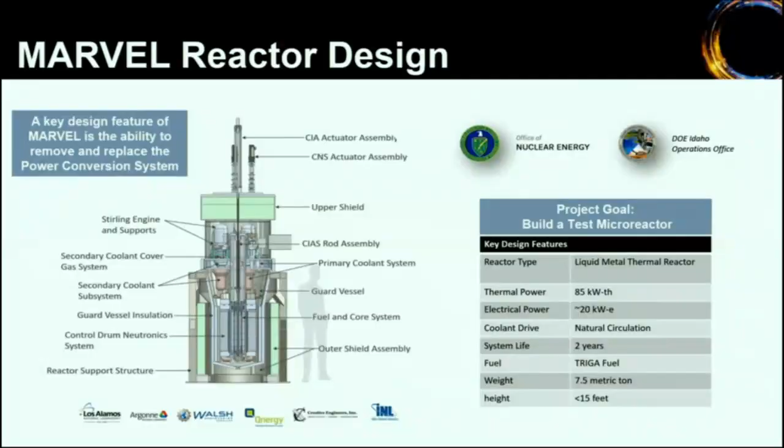MARVEL has a 2-year design life. That is more of a policy issue. We're a research and development project, so we will at this point operate for 2 years. That's not a technical limitation of the reactor. Again, it's a choice we're making. It uses TRIGA fuel, Training Research Isotope General Atomics fuel. It weighs a little less than 8 metric tons and is about 15 feet tall.

In designing and developing MARVEL, we've relied heavily on several commercial codes as well as laboratory developed codes. RELAP5-3D was used for the core thermal hydraulics modeling. As such, we need to validate these, so we have benchmark cases for all of these to ensure that we're getting accurate modeling and simulation.

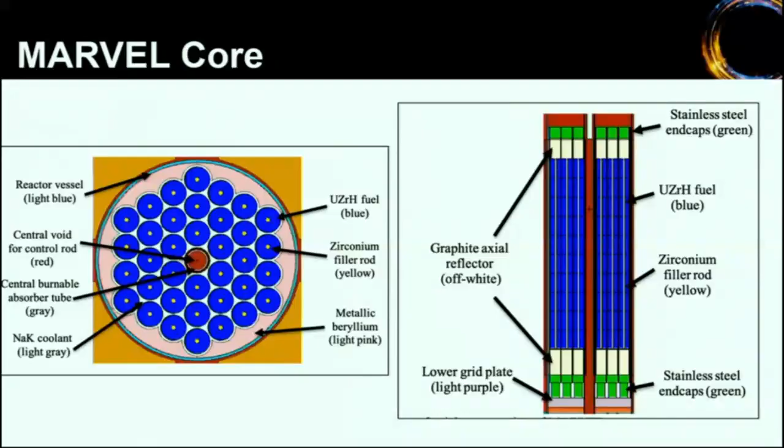This is a top-down view of the MARVEL core. It consists of 36 fuel elements, again, uranium zirconium hydride TRIGA fuel. It has a central void for a central insurance absorber for defense in depth. It utilizes a 4 control drum reactivity control system with boron carbide plates for neutron reflection or absorption. Coolant downcomer, and neutron detectors on the periphery.

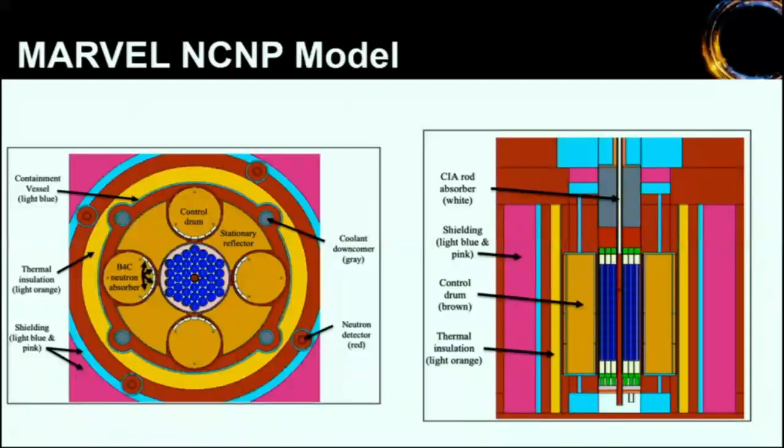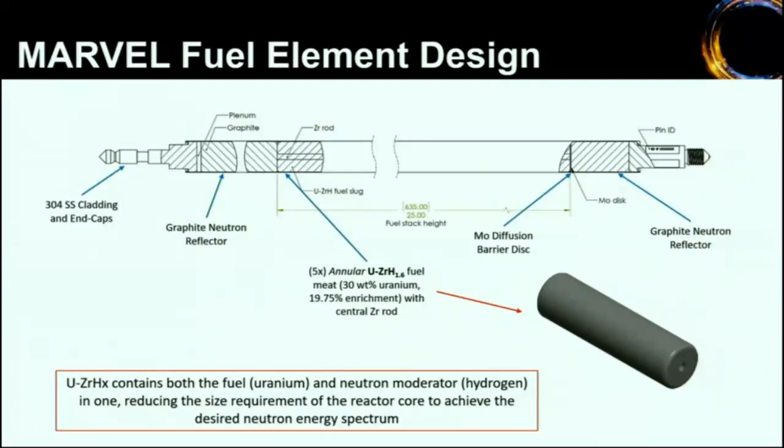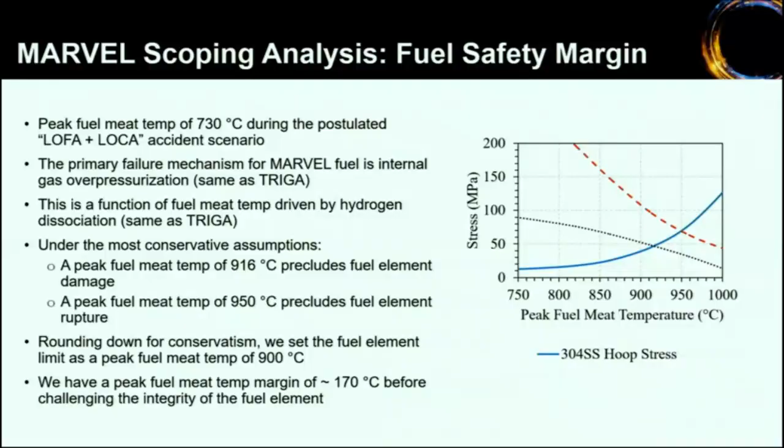If we look at the possibility of accidents, LOCA, for instance, we calculate that MARVEL fuel will reach a maximum temperature of about 730 degrees Celsius, which is about 170 degrees Celsius below the expected threshold where you might have problems with TRIGA fuel.

I talked about the reactivity control system. The central insurance absorber, when it's lifted out, enables criticality, which is controlled by the 4 control drums with the boron carbide plates. They each have individual control mechanisms. They are positively energized, meaning that in the event of an accident, if there's a scram, the energy is released, and a spring mechanism rotates the control drums and drops the central insurance absorber to ensure a less than 3-second scram target for seismic compliance.

I talked about validation of the code. We have also built a primary coolant apparatus test for validation of the core thermal hydraulics. This is an electrically heated replica of the Marvel microreactor. You see it pictured here at Creative Engineers Incorporated in New Freedom, Pennsylvania. The primary coolant apparatus test was started up in September of 2023.

We demonstrated natural circulation. I refer to this lovingly as my coffee pot, because that's essentially what we did with sodium-potassium coolant. The other thing we got out of this facility is demonstration of the Stirling engines as power conversion in this environment. There are vibration issues associated with the Stirling engines that we need to address. So we've paused to reconsider our power conversion. We still can produce process heat. Power conversion will likely be relocated away from the reactor using a Rankine cycle or Brayton cycle, for instance.

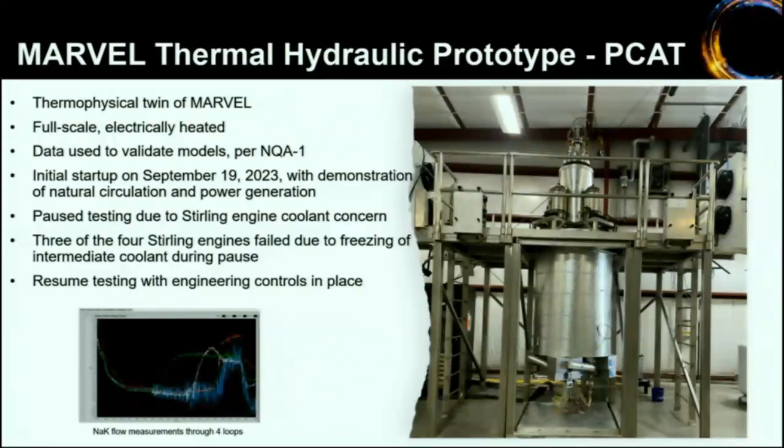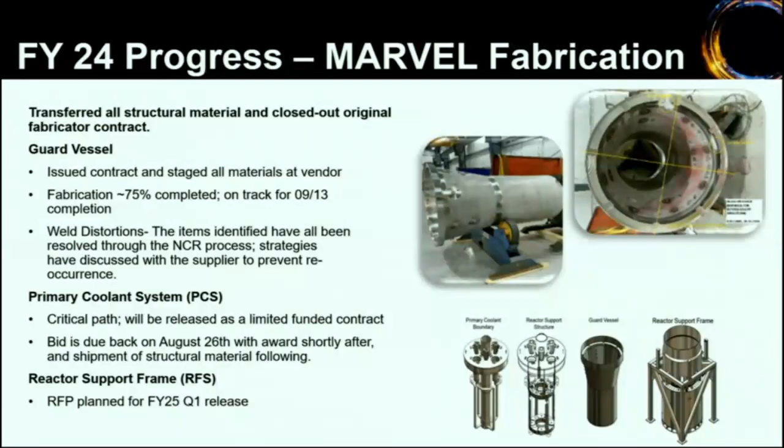Very exciting. Because we've passed 90% final design, this is a real component. This is the guard vessel, one of 4 major structural subsystems for the Marvel reactor. This was completed in early October, so just a couple of weeks ago, and is very exciting because it's the first major component. We'll move on to the primary coolant system and reactivity control system this year, with construction expected to begin in 2026. We did learn a lot of lessons about welding that we solved, and this will be helpful for future commercial deployments as they work through some of the same issues.

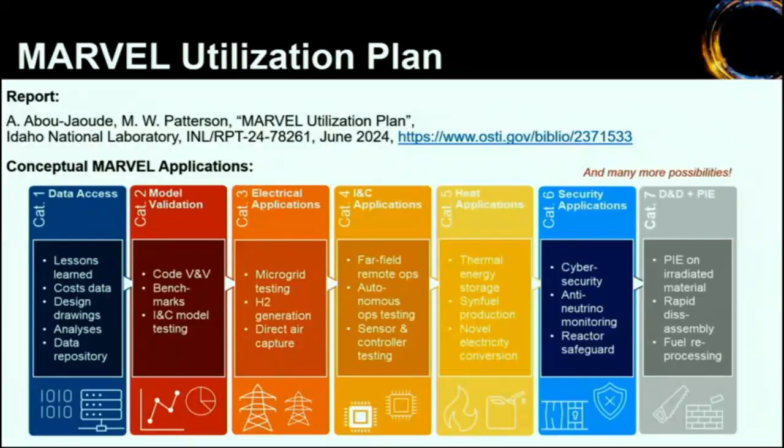We will connect to a microgrid. The data is available. On the OSTI website that I've listed here, you'll find a Marvel utilization plan. Read it. This is an opportunity to get involved and get some value out of the Marvel microreactor yourself.

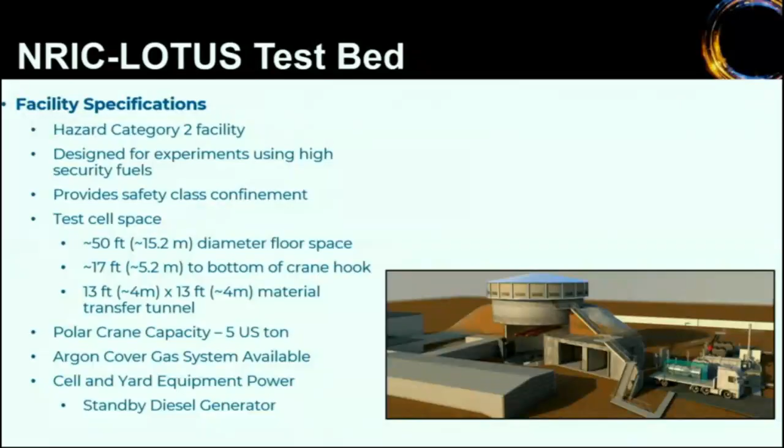Here's a little bit that explains the capabilities of our LOTUS test bed. The primary purpose is for fuels that are enriched a little bit over 20%, that they can come in and test in there and have that safe environment. And we just completed our final design on this, and we'll be moving into getting construction contracts in place where we can get this built and ready for people to come.

Our dome facility is going to be a hazard category 2 facility and provide safety class confinement, and has pretty good floor space where people can come in and bring their reactors to test. We've had to do some modifications. When the EBR-II dome was originally built, it wasn't built to be able to bring large equipment into the facility and pull it back out.

So if you're going to build a car and you're building a new engine, you don't want to necessarily have to build the whole car, but you want to be able to test that engine. You can just bring your engine, that nuclear reactor, into our facility, and we'll be able to help test it there.

One of the other big comments has been on partnering with government and private industry. Last year, the Department of Energy made $4.5 million available for industry to work with the National Reactor Innovation Center in our front-end engineering and experiment design process. We just recently completed that with Westinghouse and Radiant, and they've completed their safety design strategy, a preliminary safety design report and a conceptual safety design report. I'm waiting for approval back on those, but it's really exciting that both Radiant and Westinghouse are moving through that process.